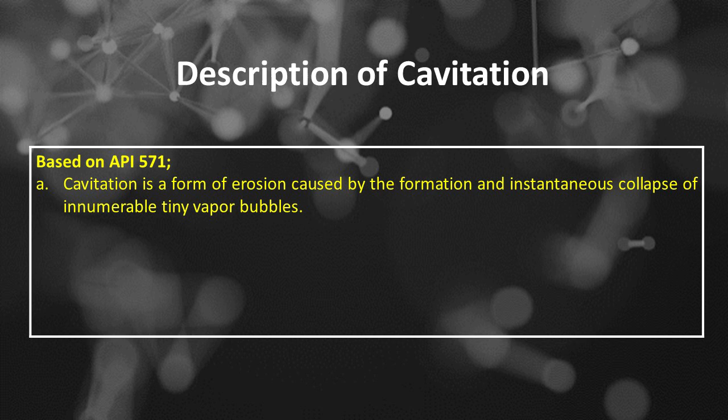The first is cavitation is a form of erosion caused by the formation and instantaneous collapse of innumerable tiny vapor bubbles. The second is the collapsing bubbles exert severe localized impact forces that can result in metal loss referred to as cavitation damage. And the third is the bubbles may contain the vapor phase of the liquid, air or other gas entrained in the liquid medium.

Cavitation damage is a form of material degradation caused by the formation and subsequent collapse of vapor bubbles in a liquid. This phenomenon occurs when the pressure in a liquid drops below its vapor pressure, leading to the creation of these bubbles, which are primarily filled with the liquid's vapor.

The bubbles, also known as cavities or voids, grow and expand in regions of low pressure. When these bubbles are transported to regions of higher pressure, they violently collapse. Here's a breakdown of the process and its effects. Number 1 is cavitation process, including: the first is bubble formation, or cavitation.

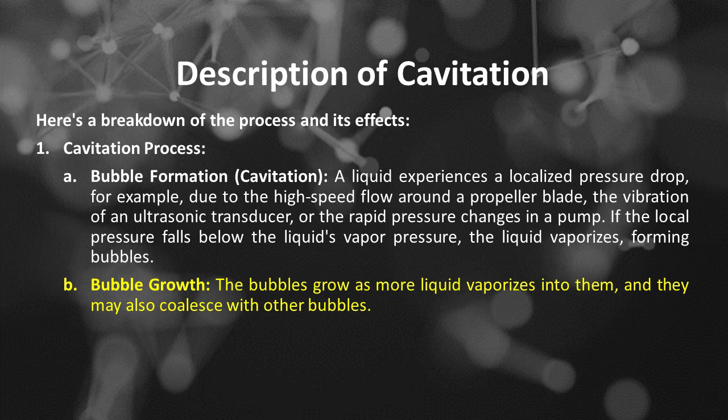A liquid experiences a localized pressure drop, for example, due to the high-speed flow around a propeller blade, the vibration of an ultrasonic transducer, or the rapid pressure changes in a pump. If the local pressure falls below the liquid's vapor pressure, the liquid vaporizes, forming bubbles. The second is bubble growth. The bubbles grow as more liquid vaporizes into them, and they may also coalesce with other bubbles.

The third is bubble collapse. As the bubbles move into regions of higher pressure, they become unstable and violently collapse. This collapse is extremely rapid and generates several key effects. The fourth is impact and damage, including:

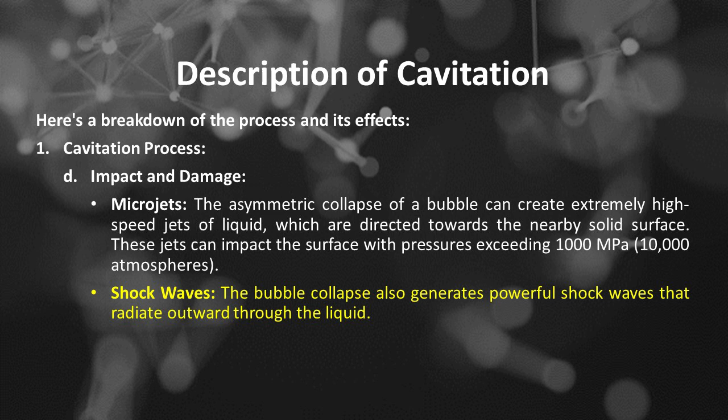Microjets. The asymmetric collapse of a bubble can create extremely high-speed jets of liquid, which are directed towards the nearby solid surface. These jets can impact the surface with pressures exceeding 1000 MPa, 10,000 atmospheres. Shock waves. The bubble collapse also generates powerful shock waves that radiate outward through the liquid. High temperatures. Localized temperatures at the point of collapse can reach thousands of degrees Celsius, though these are extremely short-lived.

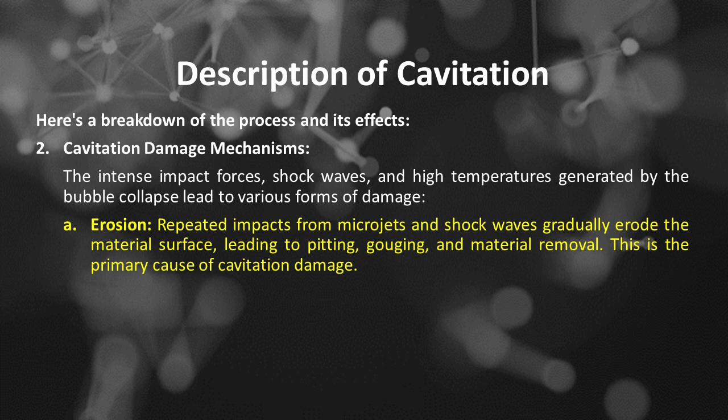Number 2 is cavitation damage mechanisms, including: the intense impact forces, shock waves, and high temperatures generated by the bubble collapse lead to various forms of damage. The first is erosion. Repeated impacts from microjets and shock waves gradually erode the material surface, leading to pitting, gouging, and material removal. This is the primary cause of cavitation damage.

The second is fatigue. The repeated stress cycles imposed on the material by the collapsing bubbles can lead to fatigue cracking and eventual failure. The third is material degradation. The high temperatures can lead to localized melting, thermal stress, and changes in the material's microstructure, further weakening it. The fourth is corrosion acceleration. Cavitation can remove protective surface layers, such as oxides, exposing the underlying material to corrosive environments and accelerating corrosion.

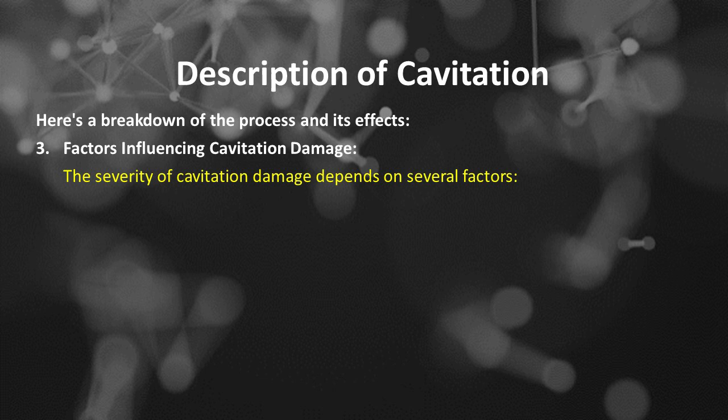Number 3 is factors influencing cavitation damage. The severity of cavitation damage depends on several factors. The first is liquid properties. The liquid's vapor pressure, viscosity, and surface tension influence the ease of bubble formation and collapse. The second is pressure fluctuations. The magnitude, frequency, and duration of pressure drops significantly affect the intensity of cavitation.

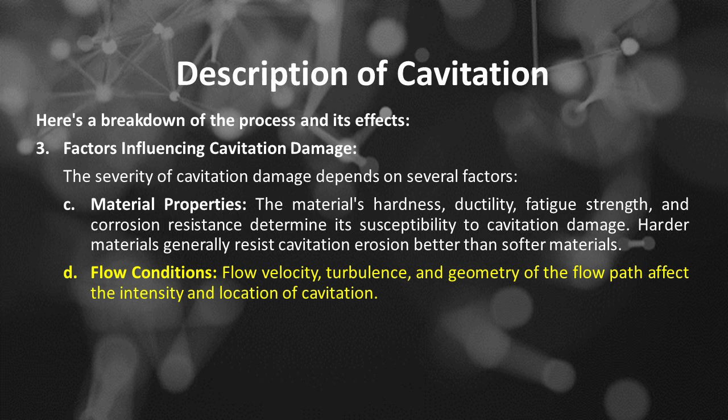The third is material properties. The material's hardness, ductility, fatigue strength, and corrosion resistance determine its susceptibility to cavitation damage. Harder materials generally resist cavitation erosion better than softer materials. The fourth is flow conditions. Flow velocity, turbulence, and geometry of the flow path affect the intensity and location of cavitation.

Number 4 is examples of cavitation damage. Cavitation damage is a significant problem in various engineering applications. The first is hydraulic machinery. Pumps, turbines, propellers, and valves can experience cavitation damage, leading to reduced efficiency, noise, vibration, and ultimately, equipment failure. The second is engines. Diesel engine cylinder liners can suffer cavitation erosion due to the collapse of bubbles near the liner surface.

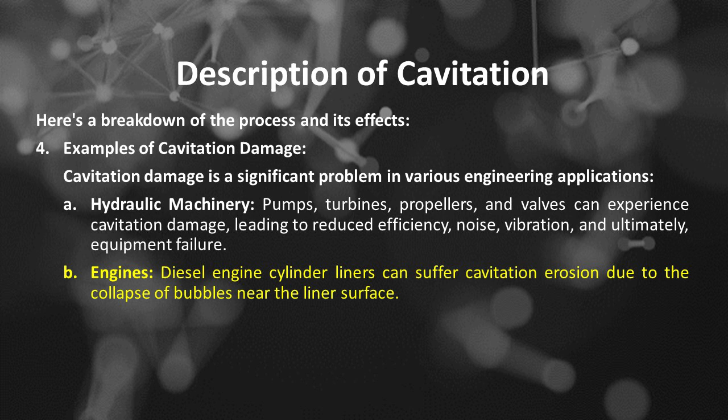The third is ultrasonic cleaning. The cavitation created in ultrasonic cleaning baths is used to remove dirt and contaminants. However, it can also cause damage to delicate parts. The fourth is medical applications. Ultrasonic devices used in medical imaging and therapy can, in some cases, lead to cavitation, which can affect the surrounding tissue. The fifth is aerospace. Cavitation can occur in fuel pumps and other components of aircraft, posing a threat to flight safety.

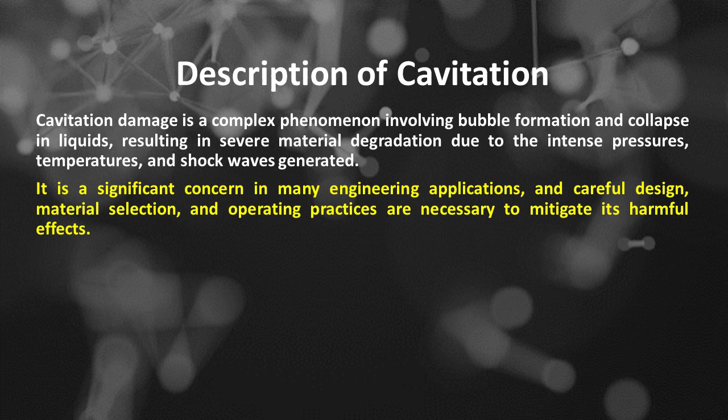Cavitation damage is a complex phenomenon involving bubble formation and collapse in liquids, resulting in severe material degradation due to the intense pressures, temperatures, and shock waves generated. It is a significant concern in many engineering applications, and careful design, material selection, and operating practices are necessary to mitigate its harmful effects. Cavitation damage mechanisms affected materials based on API 571.

Most common materials of construction including copper and brass, cast iron, carbon steel, low alloy steels, 300 series SS, 400 series SS and nickel base alloys. Cavitation damage can occur on various materials, including but not limited to: Number 1 is alloys. Cavitation damage can occur on alloys such as steel, stainless steel, titanium, and aluminum, especially under high cyclic stresses and pressure fluctuations.

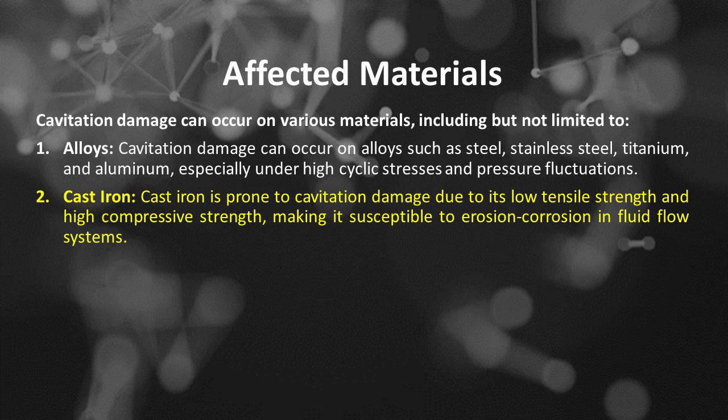Number 2 is cast iron. Cast iron is prone to cavitation damage due to its low tensile strength and high compressive strength, making it susceptible to erosion-corrosion in fluid flow systems. Number 3 is copper and copper alloys. Cavitation damage can occur on copper and its alloys, particularly in marine applications due to seawater corrosion.

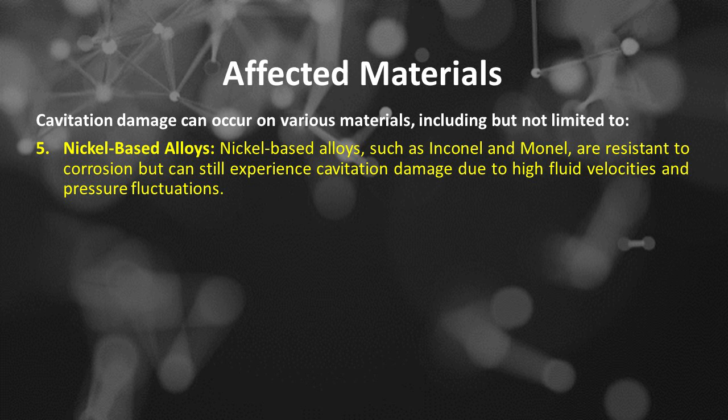Number 4 is titanium alloys. Titanium alloys, used in marine and aerospace applications, are susceptible to cavitation damage due to their high strength-to-weight ratio and low ductility. Number 5 is nickel-based alloys. Nickel-based alloys, such as Inconel and Monel, are resistant to corrosion but can still experience cavitation damage due to high fluid velocities and pressure fluctuations.

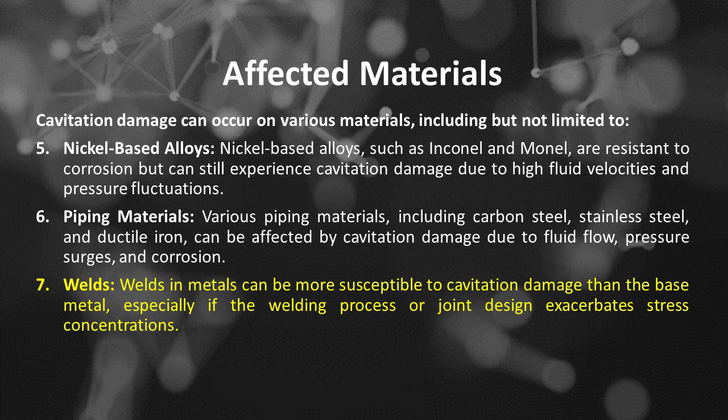Number 6 is piping materials. Various piping materials, including carbon steel, stainless steel, and ductile iron, can be affected by cavitation damage due to fluid flow, pressure surges, and corrosion. Number 7 is welds. Welds in metals can be more susceptible to cavitation damage than the base metal, especially if the welding process or joint design exacerbates stress concentrations.

Number 8 is concrete. Cavitation damage can occur on concrete surfaces, particularly in areas with high fluid velocities or pressure fluctuations, such as dam intakes or pump stations. Number 9 is plastics. Some plastics, like polyurethane, polyvinyl chloride (PVC), and acrylics, can be affected by cavitation damage due to the formation of microbubbles and erosion.

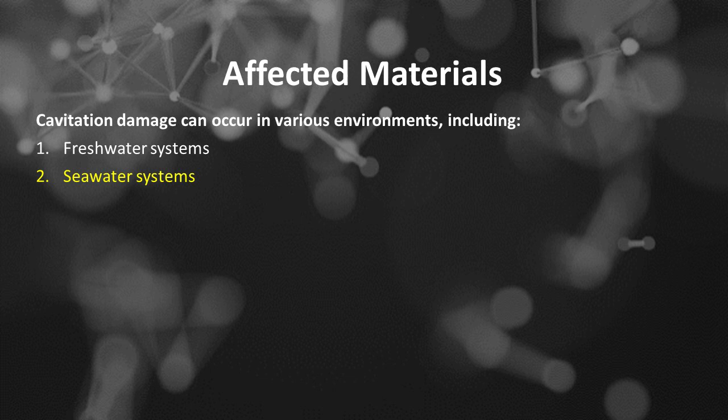Cavitation damage can occur in various environments, including: Number 1 is freshwater systems. Number 2 is seawater systems. Number 3 is industrial processes, such as chemical processing, oil refining. Number 4 is power generation systems, such as hydroelectric power plants. Number 5 is transportation systems, such as pumps, valves. Number 6 is marine vessels and equipment.

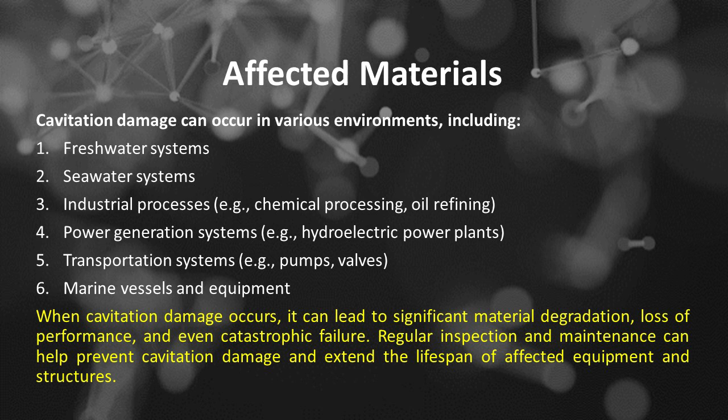When cavitation damage occurs, it can lead to significant material degradation, loss of performance, and even catastrophic failure. Regular inspection and maintenance can help prevent cavitation damage and extend the lifespan of affected equipment and structures. Cavitation damage mechanisms. Critical factors based on API 571.

The first is in a pump, the difference between the actual pressure or head of the liquid available, measured on the suction side, and the vapor pressure of that liquid is called the net positive suction head, NPSH, available. The minimum head required to prevent cavitation with a given liquid at a given flow rate is called the net positive suction head required. Inadequate NPSH can result in cavitation.

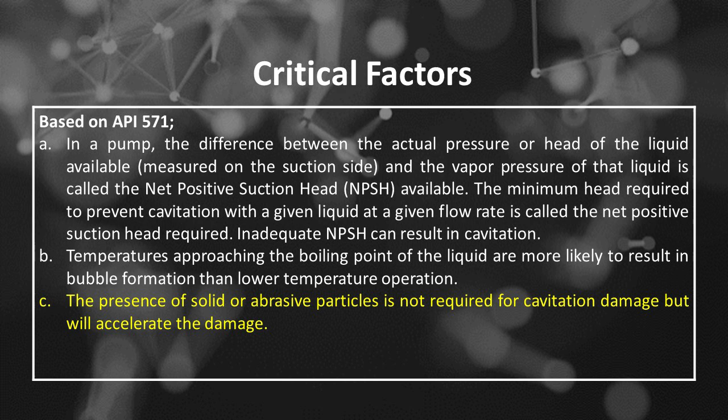The second is temperatures approaching the boiling point of the liquid are more likely to result in bubble formation than lower temperature operation. The third is the presence of solid or abrasive particles is not required for cavitation damage but will accelerate the damage. Cavitation damage is a complex phenomenon, and the critical factors influencing it can be categorized as follows.

Number 1 is fluid properties, including: The first is vapor pressure. A higher vapor pressure makes it easier for cavities to form. Fluids with higher vapor pressures are more susceptible to cavitation at a given pressure. The second is surface tension. Higher surface tension resists cavity formation and collapse, reducing cavitation intensity. The third is viscosity. Higher viscosity can dampen the collapse of cavitation bubbles, potentially reducing impact forces. However, high viscosity can also hinder the flow and contribute to pressure drops.

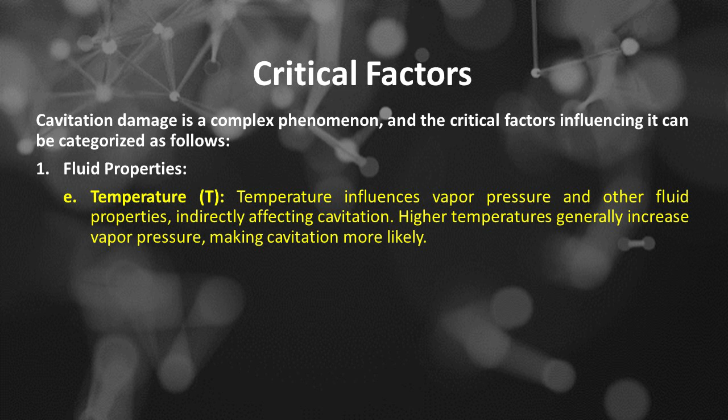The fourth is gas content. The presence of dissolved gas can affect the collapse behavior. More gas can cushion the collapse, but it can also influence the number and size of cavitation bubbles. The fifth is temperature. Temperature influences vapor pressure and other fluid properties, indirectly affecting cavitation. Higher temperatures generally increase vapor pressure, making cavitation more likely.

Number 2 is pressure conditions, including: The first is pressure fluctuations. The magnitude and rate of pressure changes are critical. Rapid and significant pressure drops below the vapor pressure are necessary for cavitation inception. The second is minimum pressure. The lower the minimum pressure reached, the more intense the cavitation and potential for damage. The third is pressure distribution. The spatial distribution of pressure gradients can determine where cavitation occurs. High-pressure gradients are favorable for cavitation.

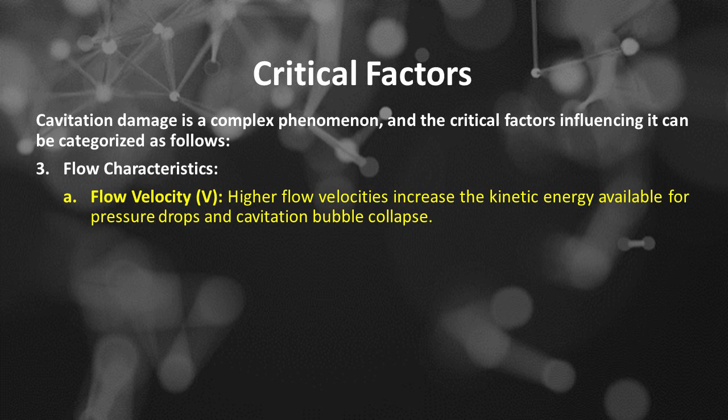Number 3 is flow characteristics, including: The first is flow velocity. Higher flow velocities increase the kinetic energy available for pressure drops and cavitation bubble collapse. The second is flow geometry. Sharp edges, changes in cross-section, and other geometric features can create regions of low pressure and promote cavitation. Examples include flow geometries. Example 1 is valves and orifices. These are common sites for cavitation due to high flow velocities and pressure drops. Flow geometries. Example 2 is impellers and pumps.

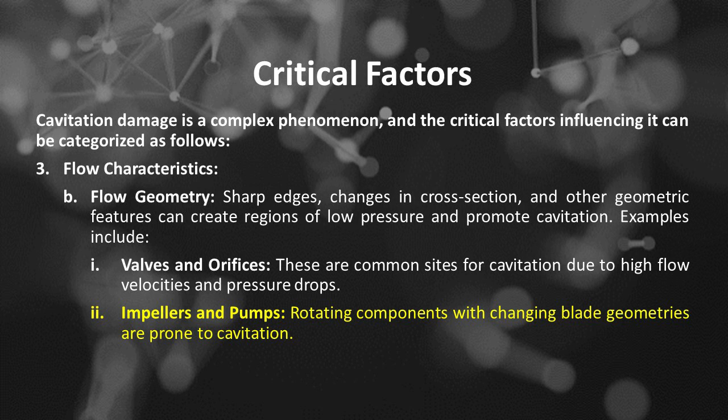Rotating components with changing blade geometries are prone to cavitation. Flow geometries, example 3, is nozzles and diffusers. Areas of flow acceleration and deceleration can create cavitation conditions. Flow geometries, example 4, is hydrofoils. The low-pressure region on the suction side can lead to cavitation.

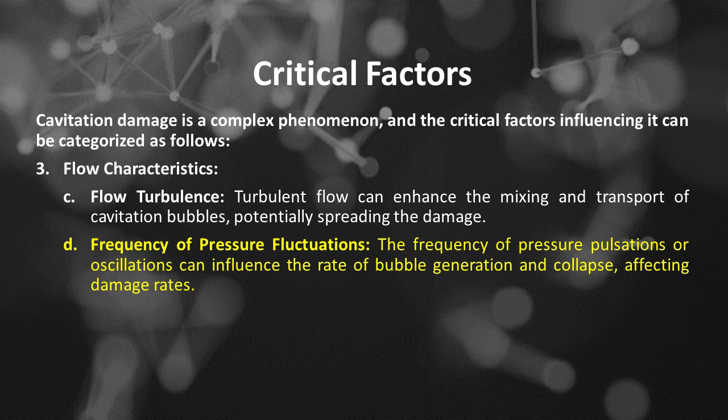The third part of flow characteristics is flow turbulence. Turbulent flow can enhance the mixing and transport of cavitation bubbles, potentially spreading the damage. The fourth part of flow characteristics is frequency of pressure fluctuations. The frequency of pressure pulsations or oscillations can influence the rate of bubble generation and collapse, affecting damage rates.

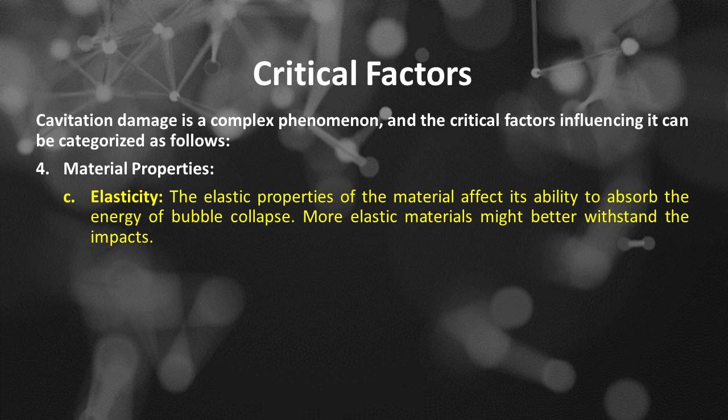Critical factors, number 4, is material properties. The first is material strength: tensile strength and hardness. Materials with lower tensile strength and hardness are more susceptible to damage from the impact of collapsing bubbles. The second is fatigue strength. Repeated cavitation impacts can lead to fatigue failure, even if the initial impact doesn't cause immediate damage. The third is elasticity. The elastic properties of the material affect its ability to absorb the energy of bubble collapse. More elastic materials might better withstand the impacts.

The fourth is corrosion resistance. Cavitation damage often removes protective surface layers, such as oxide films, which can accelerate corrosion. The combination of mechanical erosion and corrosion can be highly detrimental. The fifth is acoustic properties. The material's acoustic impedance can influence the propagation and reflection of pressure waves generated during bubble collapse, potentially affecting damage patterns.

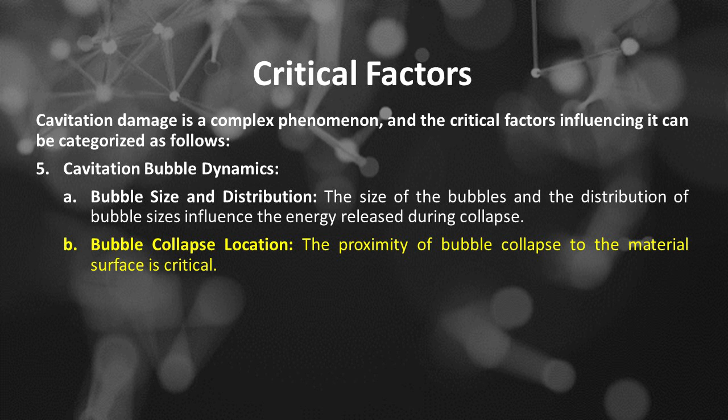Number 5 of critical factors is cavitation bubble dynamics. The first is bubble size and distribution. The size of the bubbles and the distribution of bubble sizes influence the energy released during collapse. The second is bubble collapse location. The proximity of bubble collapse to the material surface is critical. The third is shock waves: the intensity and frequency of shock waves generated by the bubble collapse. The fourth is microjets. The formation of high-speed microjets during asymmetric bubble collapse can cause significant localized damage.

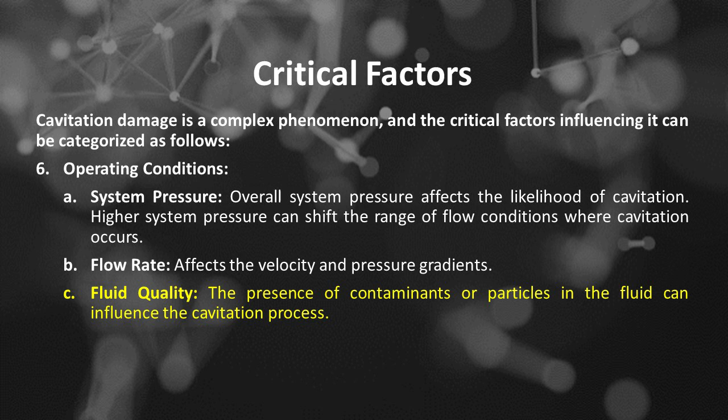Number 6 is operating conditions, which include: the first is system pressure. Overall system pressure affects the likelihood of cavitation. Higher system pressure can shift the range of flow conditions where cavitation occurs. The second is flow rate, which affects the velocity and pressure gradients. The third is fluid quality. The presence of contaminants or particles in the fluid can influence the cavitation process. The fourth is operating time, the duration of exposure to cavitation conditions.

Cavitation damage results from the complex interplay of these factors. The critical factors that dominate in a specific situation depend on the application. Understanding the influence of these factors allows engineers to design systems to minimize or eliminate cavitation, or to select materials that are more resistant to the damaging effects. Methods to mitigate cavitation include modifying flow geometries, increasing system pressure, selecting appropriate fluids, and using cavitation-resistant materials.

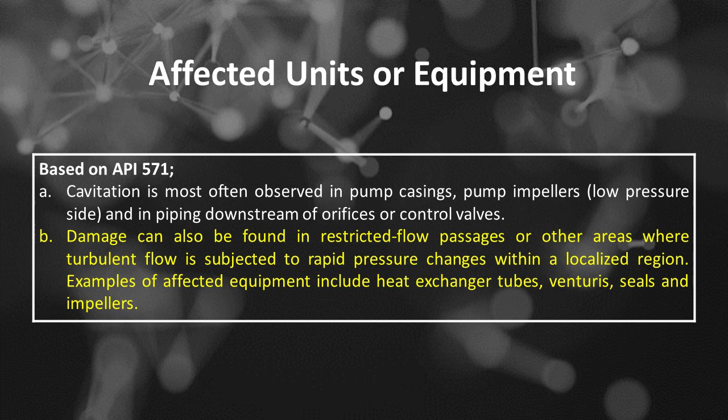Cavitation damage mechanism: affected units or equipment based on API 571. The first is that cavitation is most often observed in pump casings, pump impellers on the low pressure side, and in piping downstream of orifices or control valves. The second is that damage can also be found in restricted flow passages or other areas where turbulent flow is subjected to rapid pressure changes within a localized region. Examples of affected equipment include heat exchanger tubes, venturis, seals and impellers.

Cavitation damage affects a wide range of units and equipment where liquids experience rapid pressure changes. Here's a breakdown of common affected units or equipment. Number 1 is pumps, which include: the first is centrifugal pumps. These are particularly vulnerable due to the pressure drop at the impeller inlet. The impeller blades, casing, and volute are susceptible. The second is reciprocating pumps. Cavitation can occur at the inlet valves and cylinder walls. The third is other pump types. Any pump type is potentially at risk, especially in high-speed or high-pressure applications.

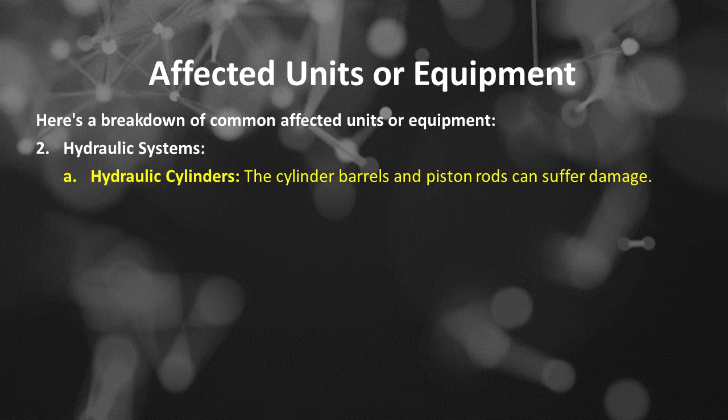Number 2 is hydraulic systems, which include: the first is hydraulic cylinders. The cylinder barrels and piston rods can suffer damage. The second is control valves. Valves, especially those controlling flow or pressure, are prone to cavitation in the valve seats and bodies. The third is hydraulic pumps and motors. Components are affected similarly to standalone pumps. The fourth is piping and fittings. Pressure drops at bends, restrictions, or changes in pipe diameter can initiate cavitation in the pipes themselves.

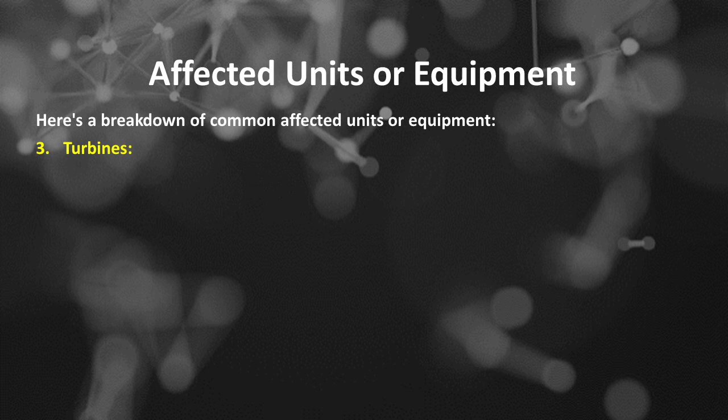Number 3 is turbines, which include: the first is hydro-turbines, such as Francis and Kaplan. The runner blades are highly susceptible to cavitation. This is a major concern in hydroelectric power generation. The second is steam turbines. Cavitation can occur in the low-pressure stages where the steam condenses.

Number 4 is propellers and marine equipment, which include: the first is ship propellers, a very common site for cavitation. The blades, especially the leading edges, are highly vulnerable. The second is underwater vehicles, such as submarines and torpedoes. Propellers, rudders, and control surfaces are all at risk. The third is water jets, with similar concerns to propellers.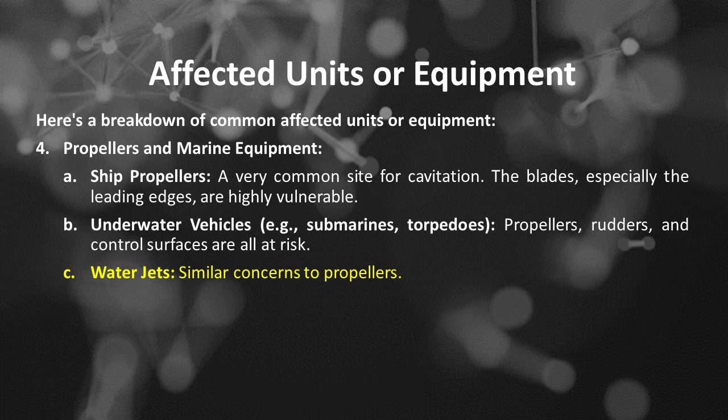The fourth is marine engines. Cavitation can affect cooling systems and other components. Number 5 is diesel engines, including:

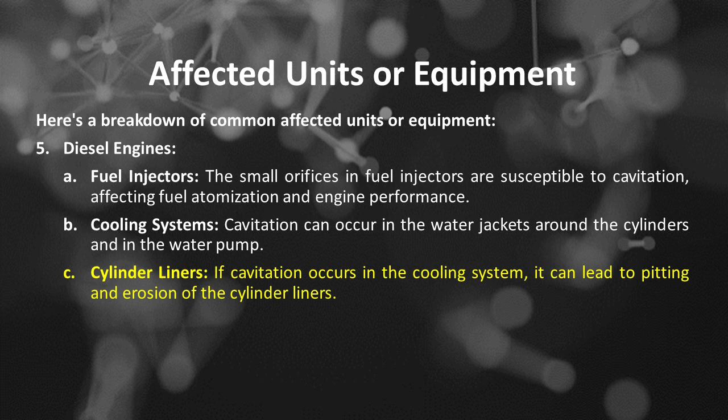The first of diesel engines is fuel injectors. The small orifices in fuel injectors are susceptible to cavitation, affecting fuel atomization and engine performance. The second of diesel engines is cooling systems. Cavitation can occur in the water jackets around the cylinders and in the water pump. The third of diesel engines is cylinder liners. If cavitation occurs in the cooling system, it can lead to pitting and erosion of the cylinder liners.

Number 6 is valves and orifices, including: The first of valves and orifices is control valves. In general, any valve regulating fluid flow is at risk, particularly if there's a significant pressure drop. The second of valves and orifices is orifices and flow meters. Cavitation can occur at the vena contracta, the narrowest point, in orifices used for flow measurement.

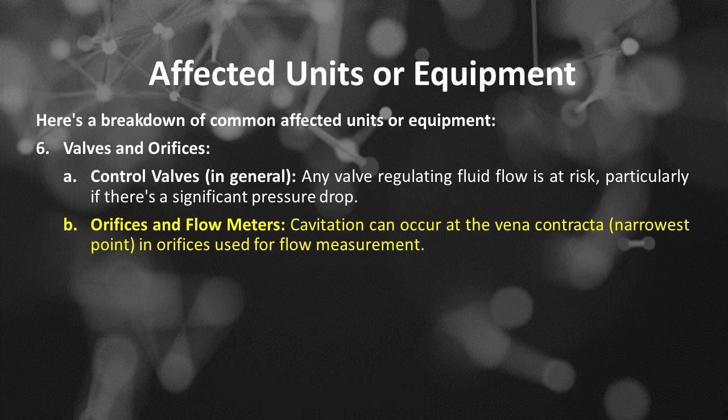Number 7 is medical devices, including: The first of medical devices is ultrasound transducers. High-intensity focused ultrasound systems can generate cavitation bubbles for therapeutic purposes, but this needs to be carefully controlled to avoid unintended damage. The second of medical devices is medical pumps. Pumps used in medical devices like dialysis machines or infusion pumps can be affected.

Number 8 is mixing and agitation equipment, including: The first of mixing and agitation equipment is impellers and stirrers. In mixing tanks and reactors, high-speed impellers can create cavitation in the liquid. The second of mixing and agitation equipment is sonochemical reactors. These reactors deliberately use cavitation to enhance chemical reactions, but the equipment must be designed to withstand the effects.

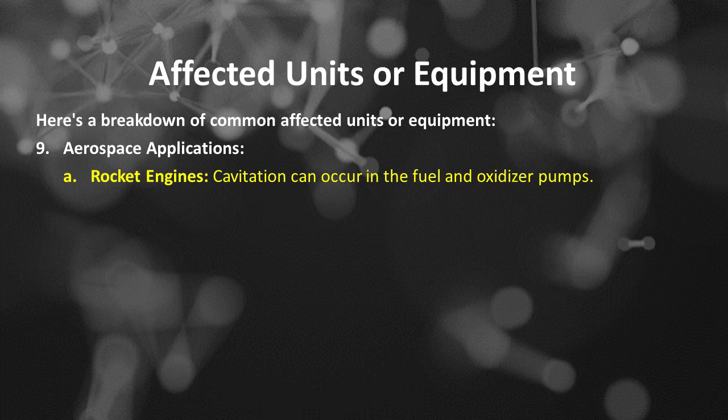Number 9 is aerospace applications, including: The first of aerospace applications is rocket engines. Cavitation can occur in the fuel and oxidizer pumps. The second of aerospace applications is high-speed aircraft components. Any component exposed to high-speed fluid flow could be at risk, although this is less common than in other applications.

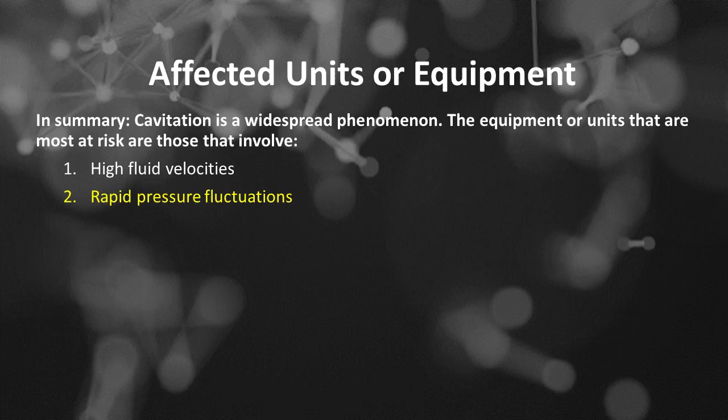In summary, cavitation is a widespread phenomenon. The equipment or units that are most at risk are those that involve: Number 1 is high fluid velocities. Number 2 is rapid pressure fluctuations. Number 3 is presence of liquids that can vaporize under low pressure. Number 4 is sharp changes in geometry which cause changes in pressure.

Appearance or morphology of cavitation damage mechanisms based on API 571. Cavitation damage generally looks like sharp-edged pitting but may also have a gouged appearance in rotational components. However, damage occurs only in localized low-pressure zones, see Figure 4-46 to Figure 4-49. Figure 4-46, cutaway of a CS butterfly valve with cavitation damage after 2 years of service due to a high-pressure drop across the valve in a hydrocarbon drain line off a cold low-pressure separator in an atmospheric resid desulfurizing unit.

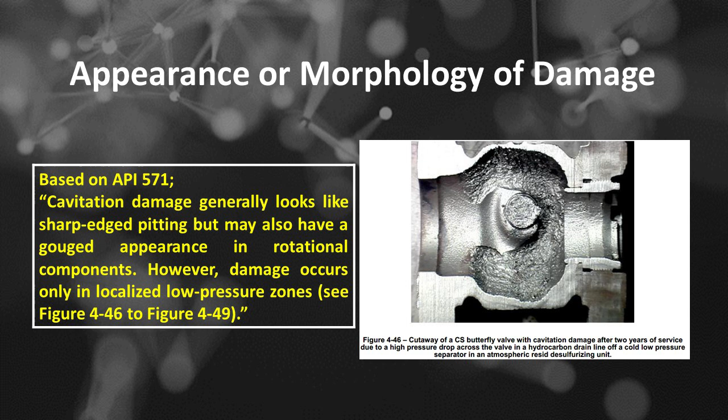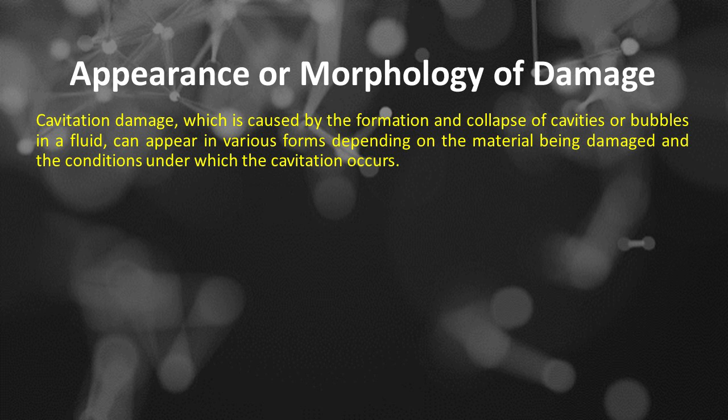Cavitation damage, which is caused by the formation and collapse of cavities or bubbles in a fluid, can appear in various forms depending on the material being damaged and the conditions under which the cavitation occurs. Here are some common morphologies or appearances of cavitation damage. Number 1 is cavitation pits or craters. These are the most common type of cavitation damage. They appear as small, rounded or hemispherical pits or craters on the surface of the material. The pits can be uniform in size and distribution or irregular and randomly spaced.

Number 2 is micro or nanoscale cracks. Cavitation can cause the formation of micro or nanoscale cracks, which can propagate to form larger cracks or even fracture the material. Number 3 is surface roughening. Cavitation can cause surface roughening, especially in metals, due to the formation of microcracks or cavities. Number 4 is cavitation holes. Large cavitation holes can form in materials, especially in situations where the cavitation is severe or prolonged.

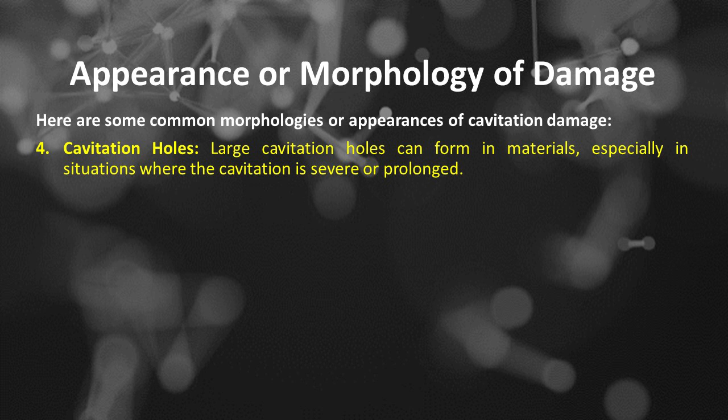Number 5 is material loss. Severe cavitation can cause significant material loss, especially in situations where the fluid is highly corrosive or the material is weak. Number 6 is pitting or corrosion. Cavitation can accelerate corrosion in materials, leading to the formation of pits or localized corrosion zones.

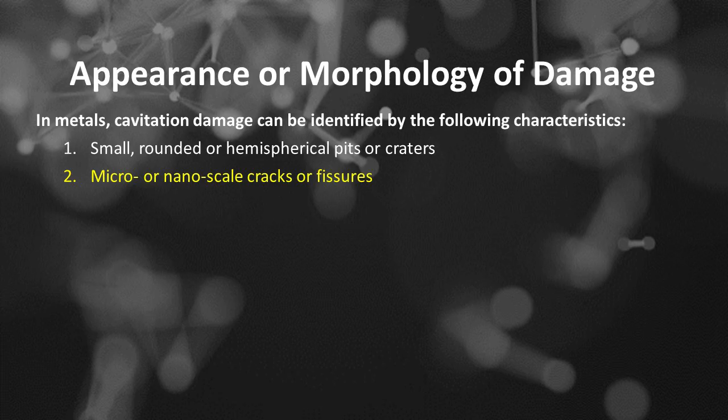In metals, cavitation damage can be identified by the following characteristics. Number 1 is small, rounded or hemispherical pits or craters. Number 2 is micro or nanoscale cracks or fissures. Number 3 is surface roughening or pitting. Number 4 is loss of surface finish or appearance. Number 5 is material loss or thinning. In composites, cavitation damage can be identified by the following characteristics. Number 1 is blisters or bubbles on the surface.

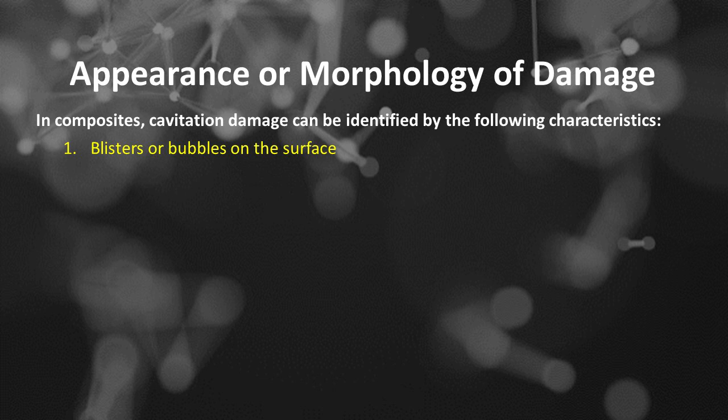Number 2 is delamination or debonding between layers. Number 3 is cracking or fracture of fibers or matrix. Number 4 is surface roughening or pitting. Number 5 is material loss or thinning.

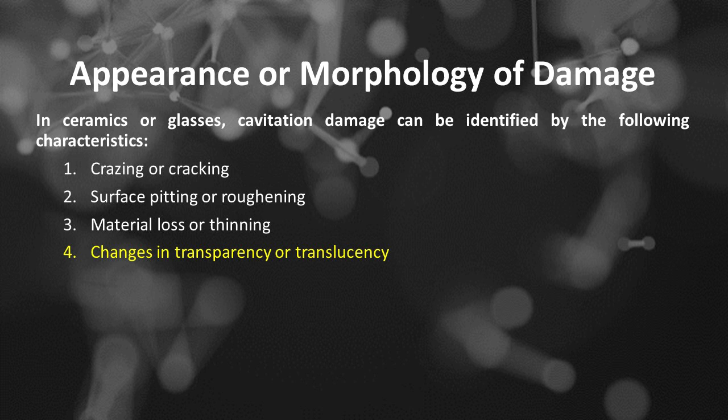In ceramics or glasses, cavitation damage can be identified by the following characteristics. Number 1 is crazing or cracking. Number 2 is surface pitting or roughening. Number 3 is material loss or thinning. Number 4 is changes in transparency or translucency.

It's essential to note that the appearance or morphology of cavitation damage can vary depending on the material being damaged, the operating conditions, and the duration of the cavitation event.

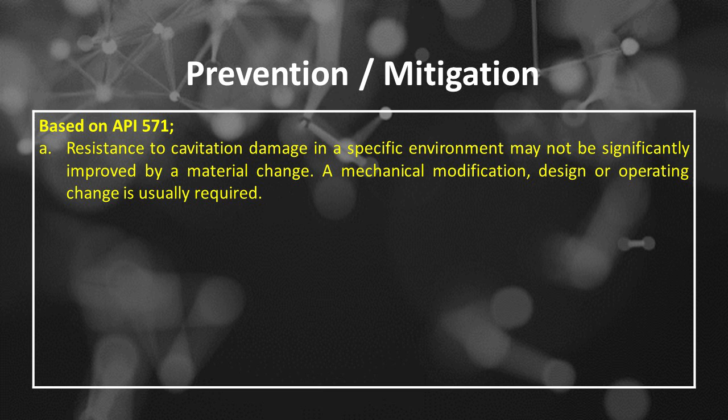Cavitation damage mechanisms prevention and mitigation based on API 571. The first is resistance to cavitation damage in a specific environment may not be significantly improved by a material change. A mechanical modification, design or operating change is usually required. The second is cavitation is best prevented by avoiding conditions that allow the absolute pressure to fall below the vapor pressure of the liquid or by changing the material properties.

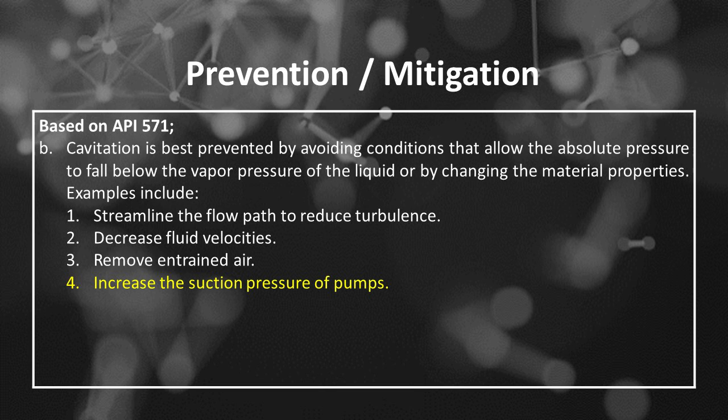Examples include: streamline the flow path to reduce turbulence, decrease fluid velocities, remove entrained air, increase the suction pressure of pumps, alter the fluid properties, perhaps by adding additives. Use hard surfacing or hard facing. Use of harder and/or more corrosion-resistant alloys.

The third of cavitation damage mechanisms based on API 571 is attack is accelerated by the mechanical disruption of protective films at the liquid-solid interface, such as a protective corrosion scale or passive films. Therefore, changing to a more corrosion-resistant and/or higher hardness material may not improve cavitation resistance. Excessively hard materials may not be suitable if they lack the toughness required to withstand the high local pressures and impact, shear loads, of the collapsing bubbles.

Cavitation damage can be prevented or mitigated through various strategies focusing on eliminating or reducing the conditions that lead to bubble formation and collapse. Here's a breakdown of common prevention and mitigation methods. Number 1 is design and operation optimization. The first of design and operation optimization is reduce flow velocity. Lowering fluid velocity is a fundamental approach.

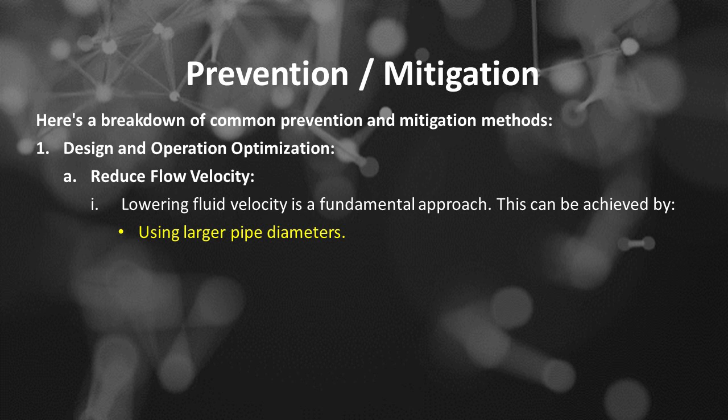This can be achieved by using larger pipe diameters, optimizing pump speeds, carefully designing bends, valves, and other flow restrictions to minimize localized high-velocity areas. This directly reduces the pressure drop and shear forces that trigger cavitation.

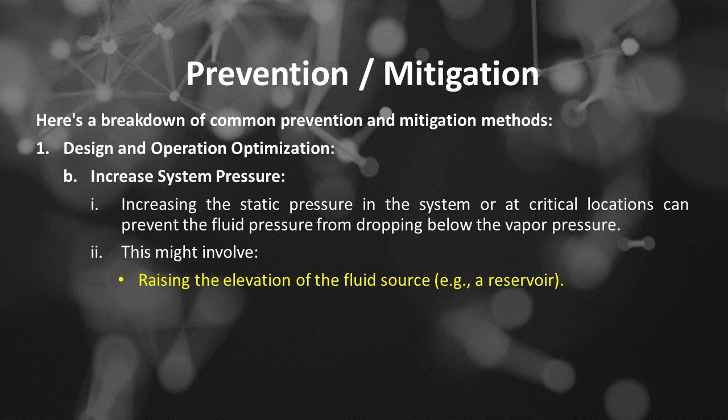The second of design and operation optimization is increase system pressure. Increasing the static pressure in the system or at critical locations can prevent the fluid pressure from dropping below the vapor pressure. This might involve the following. Raising the elevation of the fluid source, such as a reservoir. Using pressurized tanks or closed systems. Ensuring sufficient net positive suction head, or NPSH, available for pumps.

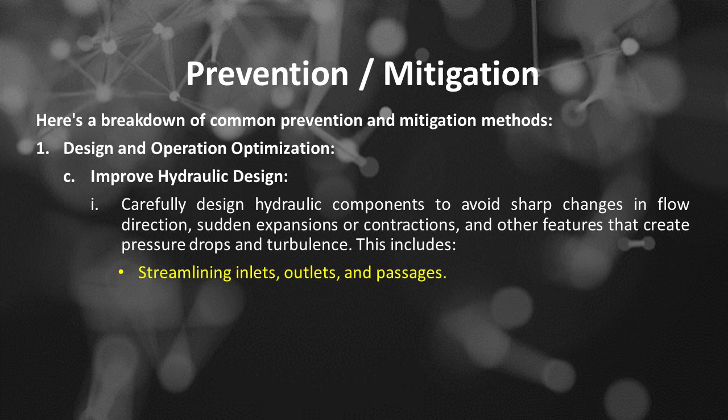The third of design and operation optimization is improve hydraulic design. Carefully design hydraulic components to avoid sharp changes in flow direction, sudden expansions or contractions, and other features that create pressure drops and turbulence. This includes streamlining inlets, outlets, and passages. Using diffusers to recover pressure. Optimizing the shape and placement of pump impellers.

The fourth of design and operation optimization is operate within recommended limits. Always adhere to the manufacturer's operating guidelines for pumps, valves, and other equipment. This includes staying within specified flow rates, pressures, and temperatures. Avoid operating pumps at excessively low or high flow rates, often away from the best efficiency point, BEP, as this can increase cavitation risk.

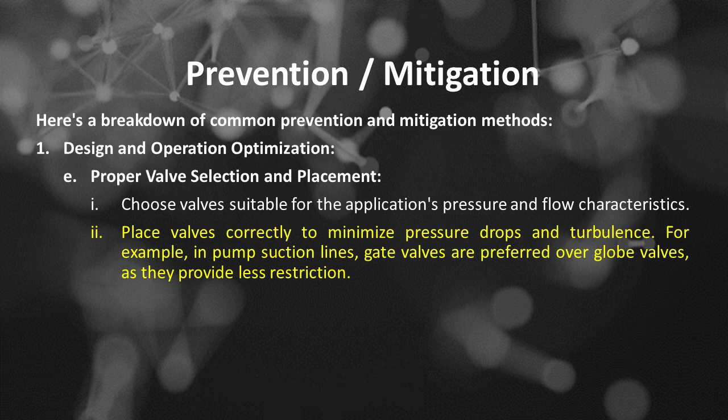The fifth of design and operation optimization is proper valve selection and placement. Choose valves suitable for the application's pressure and flow characteristics. Place valves correctly to minimize pressure drops and turbulence. For example, in pump suction lines, gate valves are preferred over globe valves, as they provide less restriction.

Number 2 of the common prevention and mitigation methods is material selection and surface treatments. The first of material selection and surface treatments is use cavitation-resistant materials. Select materials that are less susceptible to damage from cavitation erosion. Common choices include stainless steels, such as 316 stainless steel. High-strength alloys, such as nickel aluminum bronze, Ni-Resist. Cobalt-based alloys, such as Stellite.

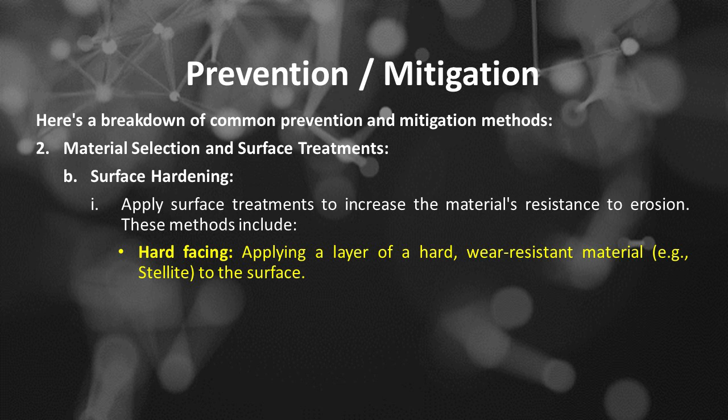The second of material selection and surface treatments is surface hardening. Apply surface treatments to increase the material's resistance to erosion. These methods include hard facing, applying a layer of a hard, wear-resistant material, e.g., Stellite, to the surface. Thermal spraying, applying a coating of a protective material, such as ceramic or metal alloys. Case hardening, surface hardening techniques like carburizing or nitriding can increase surface hardness. Shot peening, introducing compressive stresses on the surface.

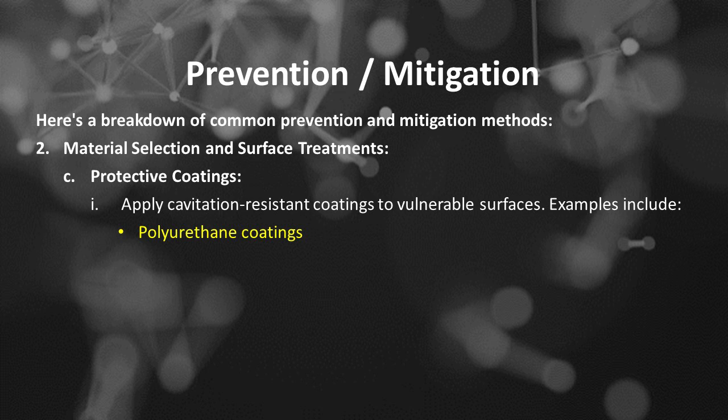The third of material selection and surface treatments is protective coatings. Apply cavitation-resistant coatings to vulnerable surfaces. Examples include polyurethane coatings, epoxy coatings, elastomeric coatings, specialized ceramic or metallic coatings.

Number 3 of common prevention and mitigation methods is operational practices and monitoring. The first of operational practices and monitoring is regular inspection and maintenance.

Implement a regular inspection schedule to identify and address early signs of cavitation damage, such as pitting, erosion, or noise. Regularly inspect and maintain pumps, valves, and other components to ensure they operate correctly and prevent the conditions that promote cavitation.

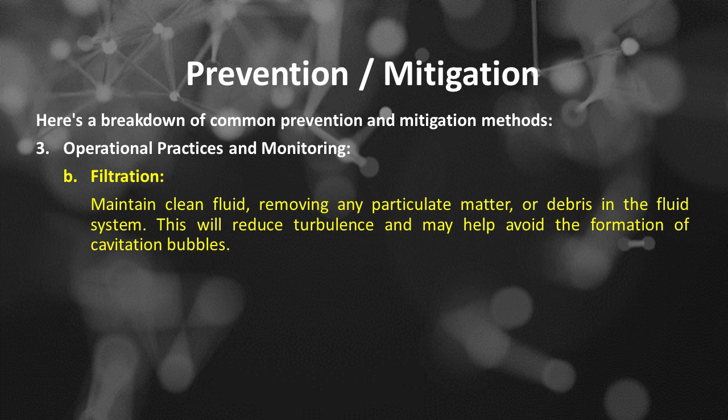The second of operational practices and monitoring is filtration. Maintain clean fluid, removing any particulate matter or debris in the fluid system. This will reduce turbulence and may help avoid the formation of cavitation bubbles.

The third of operational practices and monitoring is air injection. In some cases, injecting small amounts of air or another inert gas into the fluid can help cushion the bubble collapse and reduce the intensity of the impact. This is not a universally applicable solution and needs to be carefully controlled.

The fourth of operational practices and monitoring is vibration analysis and noise monitoring. Use vibration sensors and acoustic monitoring equipment to detect the presence of cavitation. Cavitation often produces distinctive noise and vibration patterns. This allows for early detection and intervention.

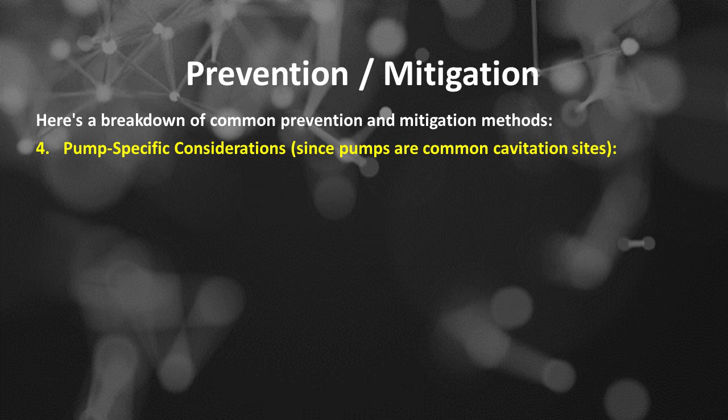Number 4 of common prevention and mitigation methods is pump-specific considerations, since pumps are common cavitation sites. The first of pump-specific considerations is ensure sufficient NPSH, net positive suction head. NPSH available, NPSHA, must always be greater than NPSH required, NPSHR, for a pump to avoid cavitation on the suction side. NPSHA is a measure of the pressure at the pump inlet, accounting for static pressure, elevation, and frictional losses.

NPSHR is a characteristic of the pump itself, specified by the manufacturer, representing the minimum pressure needed at the inlet to prevent cavitation. Carefully calculate NPSHA and compare it to the pump's NPSHR across the operating range.

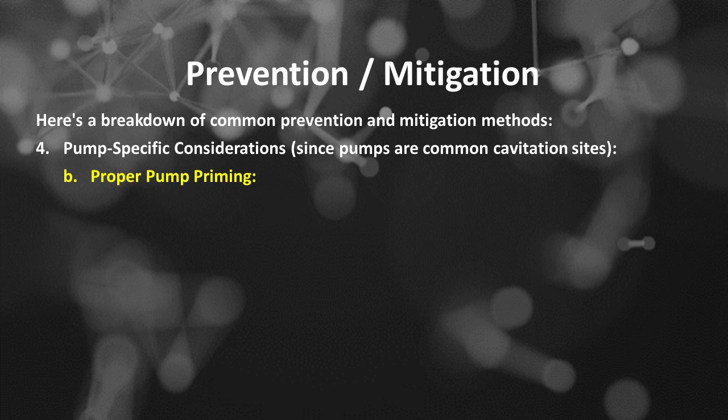The second of pump-specific considerations is proper pump priming. Make sure the pump is fully primed before starting it. This involves ensuring the pump and suction lines are filled with fluid and that there is no trapped air. Air in the suction can readily trigger cavitation.

The third of pump-specific considerations is control pump speed, variable speed drives, VSDs. Use variable speed drives to control pump speed, allowing for adjustments to maintain optimal performance and reduce cavitation risk based on changing operating conditions.

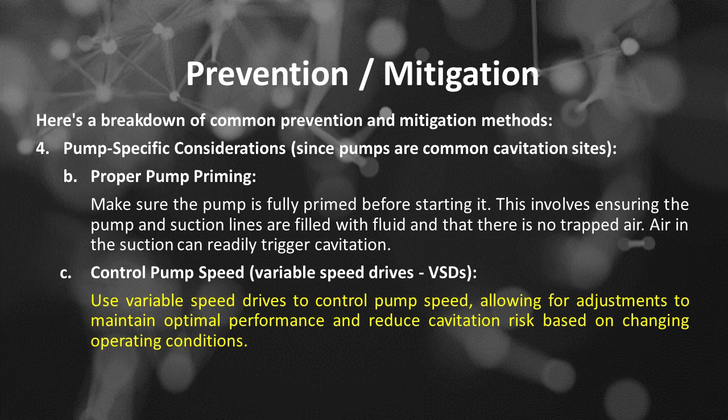The fourth of pump-specific considerations is optimize impeller design and clearance. In pump design, engineers can use design modifications such as modified impeller blade shapes and optimized clearances to reduce the potential for cavitation.

Number 5 of common prevention and mitigation methods is advanced technologies. The first of advanced technologies is ultrasonic techniques. Some research explores the use of ultrasonic vibrations to help break up or disperse cavitation bubbles. This is still largely experimental.

The second of advanced technologies is computational fluid dynamics, or CFD. Use CFD simulations to model fluid flow and predict areas prone to cavitation. This helps in optimizing designs and identifying potential problems before construction or operation.

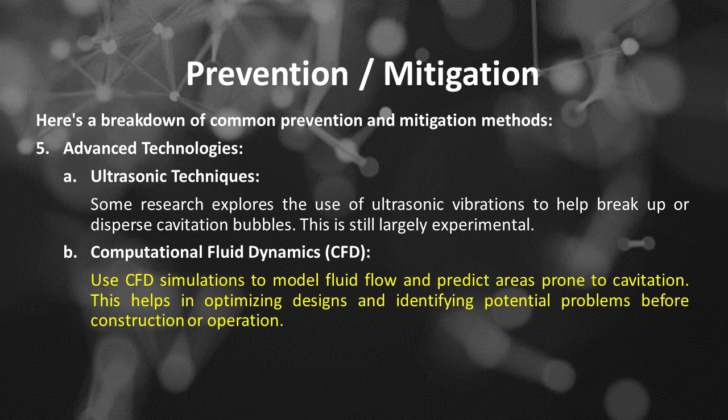In summary, preventing and mitigating cavitation damage is often a multifaceted approach. The best strategy depends on the specific application, the fluid properties, the operating conditions, and the equipment involved. It's usually more effective to prevent cavitation through careful design and operation rather than trying to repair damage after it occurs. A combination of these strategies will provide the best protection against cavitation damage.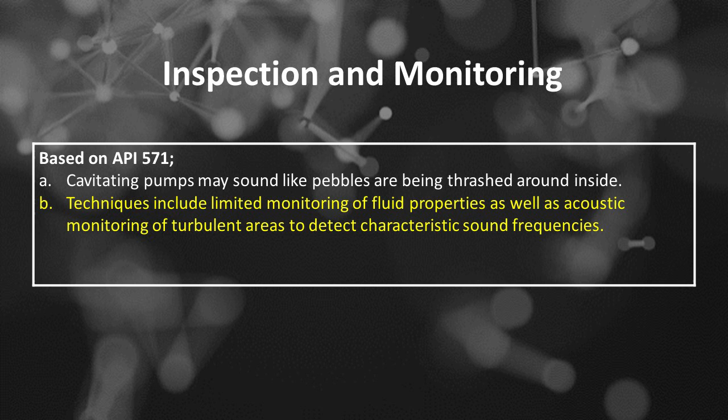Inspection and monitoring methods to detect cavitation damage mechanisms based on API 571. The first is cavitating pumps may sound like pebbles are being thrashed around inside. The second is techniques include limited monitoring of fluid properties as well as acoustic monitoring of turbulent areas to detect characteristic sound frequencies. The third is visual examination of suspected areas, as well as external UT and RT can be used to monitor for loss in thickness.

Cavitation damage can be detected using a variety of inspection and monitoring methods, which can be broadly categorized as visual inspection, acoustic monitoring, vibration analysis, and performance monitoring. Here's a breakdown of each inspection and monitoring category. Number 1 is visual inspection.

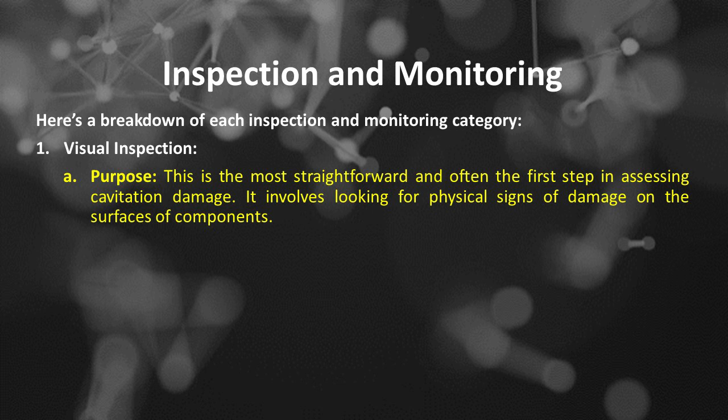The purpose of visual inspection is, this is the most straightforward and often the first step in assessing cavitation damage. It involves looking for physical signs of damage on the surfaces of components. The methods of visual inspection include: the first method is direct visual inspection, which requires shutting down the equipment and physically inspecting the components. This can be done using the naked eye, magnifying glasses, or borescopes for inspecting hard-to-reach areas.

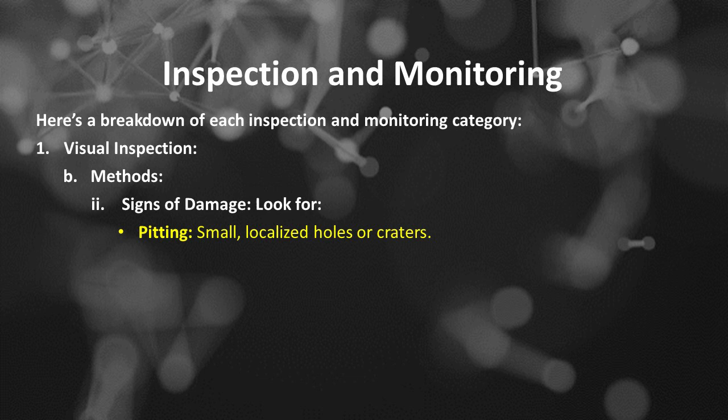The second method of visual inspection is to find signs of damage. Look for pitting, commonly signs such as small, localized holes or craters. Erosion, commonly signs such as material removal, creating rough, uneven surfaces. Cracking, commonly signs such as fine or gross cracks, especially near areas of high stress. Surface changes, commonly signs such as discoloration and changes in surface texture.

Number 2 is acoustic monitoring. The purpose of acoustic monitoring is, cavitation generates characteristic noise due to the implosion of vapor bubbles.

Acoustic monitoring detects and analyzes these sounds. The methods of acoustic monitoring include: the first method of acoustic monitoring is hydrophones or accelerometers. These sensors are placed in the fluid or on the equipment to pick up the acoustic signals. The second method of acoustic monitoring is ultrasonic testing, which uses high-frequency sound waves to detect cavitation activity.

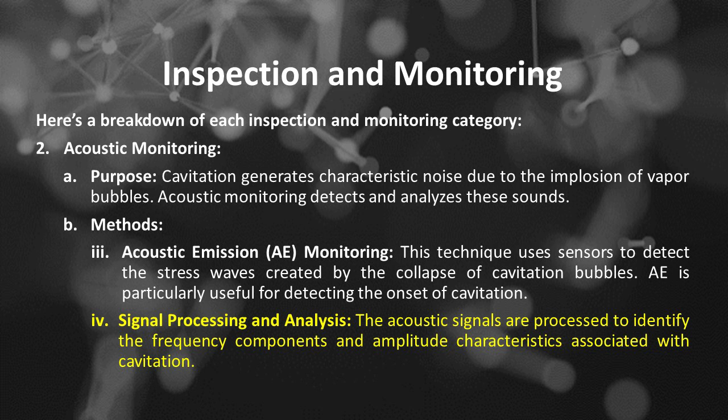The third method of acoustic monitoring is acoustic emission monitoring. This technique uses sensors to detect the stress waves created by the collapse of cavitation bubbles. Acoustic emission is particularly useful for detecting the onset of cavitation. The fourth method of acoustic monitoring is signal processing and analysis. The acoustic signals are processed to identify the frequency components and amplitude characteristics associated with cavitation.

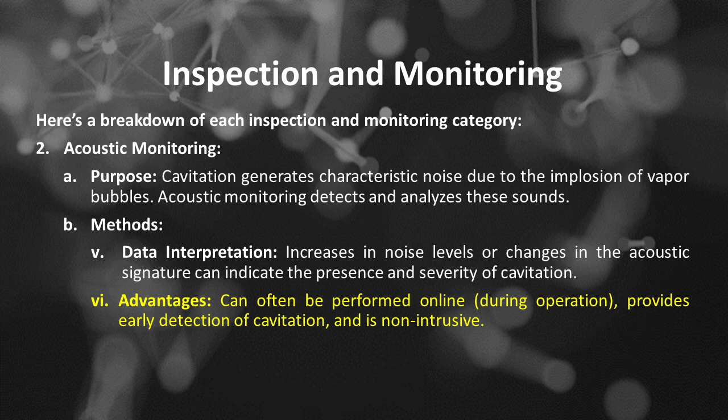The fifth method of acoustic monitoring is data interpretation. Increases in noise levels or changes in the acoustic signature can indicate the presence and severity of cavitation. The sixth is advantages: this inspection or detection method can often be performed online, during operation, provides early detection of cavitation, and is non-intrusive.

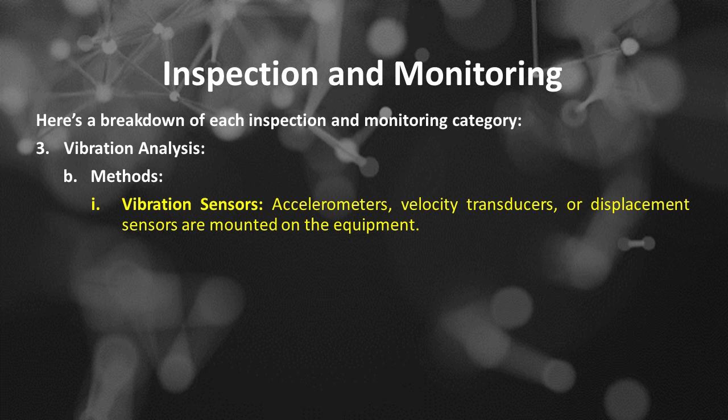Number 3 is vibration analysis. The purpose of vibration analysis is that cavitation can induce vibrations in the equipment as the bubbles collapse and generate shock waves. Analyzing these vibrations helps to assess the extent of cavitation. The methods of vibration analysis include: the first is vibration sensors; accelerometers, velocity transducers, or displacement sensors are mounted on the equipment. The second method of vibration analysis is frequency analysis.

The vibration signals are analyzed in the frequency domain using techniques like fast Fourier transform, or FFT. The third method of vibration analysis is signature analysis. Look for characteristic vibration frequencies related to cavitation. Often, vibration energy increases at specific frequencies related to the bubble collapse process and its harmonics. The fourth method of vibration analysis is time domain analysis, which can be useful for detecting impulsive events.

The fifth method of vibration analysis is data interpretation. Increased vibration levels, especially at specific frequencies, often correlated with the cavitation frequency, can indicate cavitation damage. The sixth is advantages: relatively easy to implement, can provide online monitoring, and can detect cavitation even if it's not directly producing loud noises.

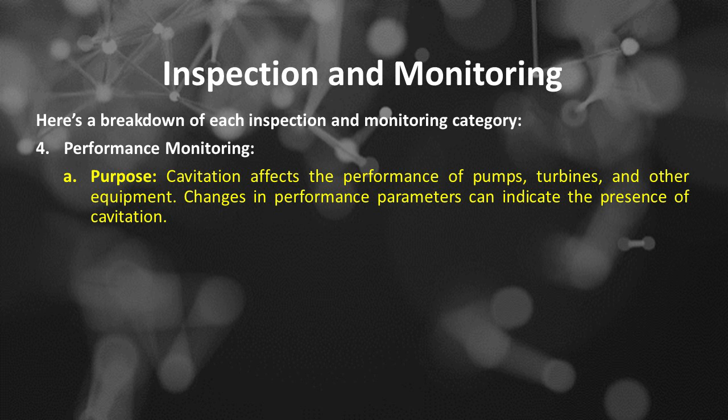Number 4 is performance monitoring. The purpose of performance monitoring is that cavitation affects the performance of pumps, turbines, and other equipment. Changes in performance parameters can indicate the presence of cavitation. The methods of performance monitoring include: the first is flow rate measurement. Decreases in flow rate at a constant pump speed can suggest cavitation.

The second method of performance monitoring is pressure measurement: monitoring the inlet and outlet pressures of pumps or turbines. Cavitation can lead to a drop in pressure. Number 5 is continuous improvement. Use data from monitoring and inspections to identify areas for improvement.

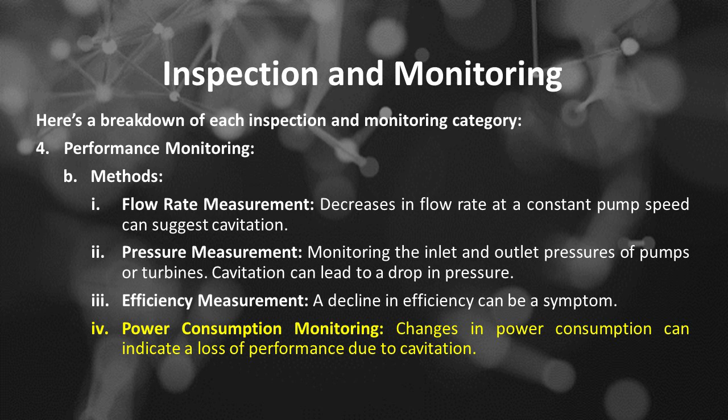The fourth method of performance monitoring is power consumption monitoring. Changes in power consumption can indicate a loss of performance due to cavitation. The fifth method of performance monitoring is temperature monitoring. The collapse of cavitation bubbles can generate localized heat. Monitoring temperature changes can be an indicator.

The sixth method of performance monitoring is cavitation number calculations. Calculate the cavitation number at different operating conditions and compare it to the critical cavitation number for the device to determine the likelihood of cavitation. Number 5 is other methods. The first is oil analysis. Analyzing the oil for wear debris can sometimes indicate cavitation damage, especially in hydraulic systems.

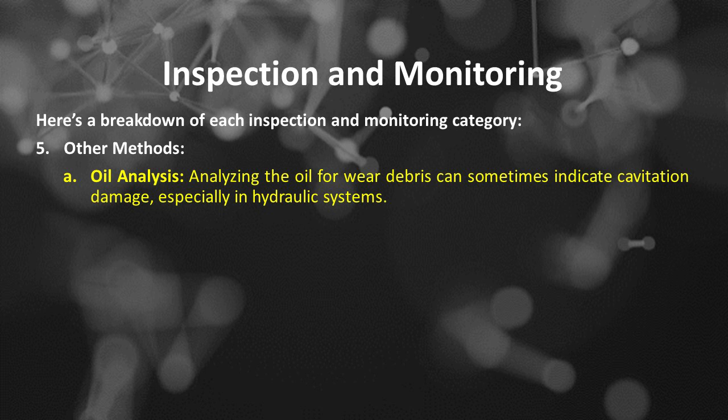The second is computational fluid dynamics, or CFD, simulation. CFD can model the fluid flow and predict cavitation zones, allowing for proactive design and operational changes. The third is high-speed photography or videography, which can be used in laboratory settings to visualize cavitation bubble formation and collapse. The fourth is radiography and ultrasonic testing, or UT. These non-destructive testing methods can identify internal damage caused by cavitation, such as cracks or material thinning, without disassembling the equipment.

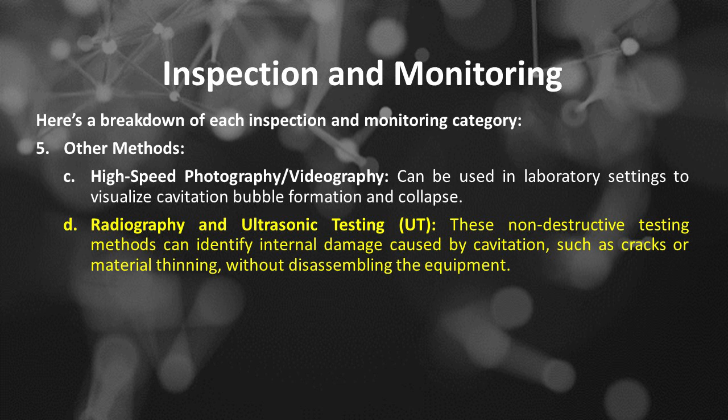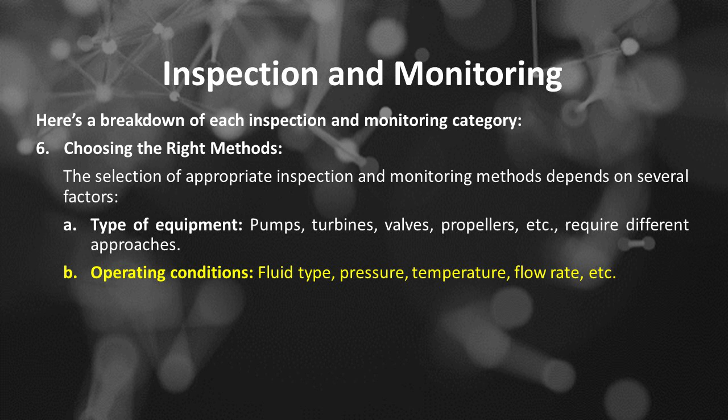Number 6 of the inspection and monitoring category is choosing the right methods. The selection of appropriate inspection and monitoring methods depends on several factors. The first is type of equipment: pumps, turbines, valves, propellers, etc., require different approaches. The second is operating conditions: fluid type, pressure, temperature, flow rate, etc. The third is accessibility. How easily can the equipment be accessed for inspection or sensor placement?

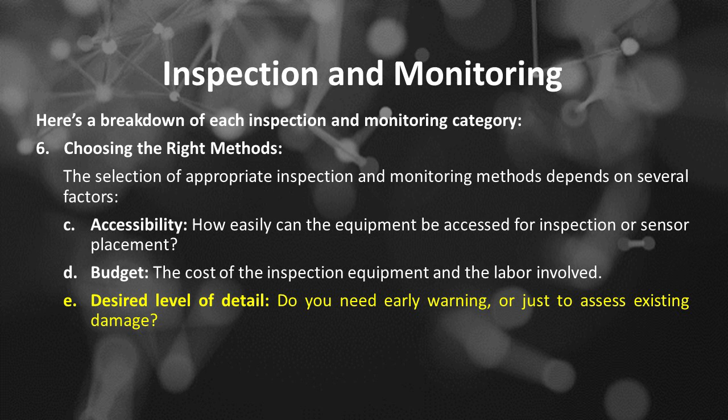The fourth is budget, the cost of the inspection equipment and the labor involved. The fifth is desired level of detail. Do you need early warning, or just to assess existing damage? It is often best to combine multiple methods for a comprehensive assessment. For example, combining visual inspection with acoustic monitoring, or performance monitoring with vibration analysis, can provide a more complete picture of cavitation damage. Early detection and preventative measures are crucial to minimizing the impact of cavitation on equipment life and performance. Thank you.